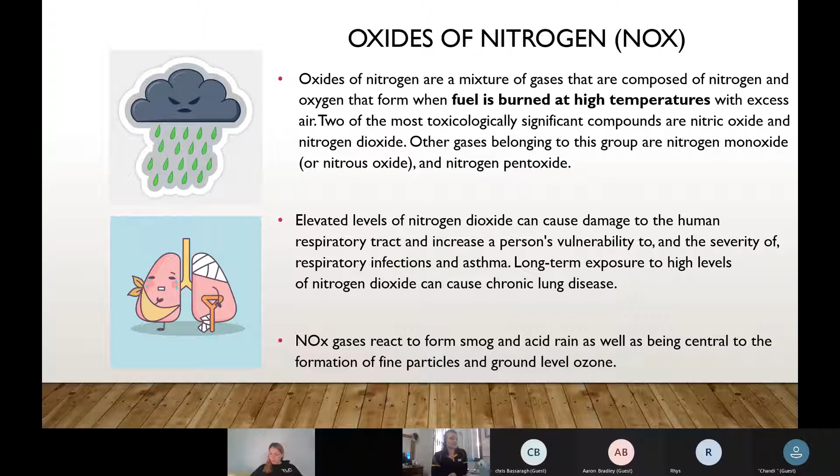The other pollutant that we focus on, or that the industry is focusing on getting rid of from our engines, is particulate matter. Particulate matter is solid and liquid particles suspended in air, formed pretty much in incomplete combustion.

At a low temperature combustion, so on startup, we usually get a bit of black smoke on that gear change when our revs fluctuate a lot. We get incomplete combustion, which then forms particulate matter.

There's a whole heap of other chemicals that also come out of our exhaust, but NOx and particulate matter are the most important. Particulate matter is pretty much anything you can see coming out of the exhaust pipe. So yeah, there are two main ones that we focus on.

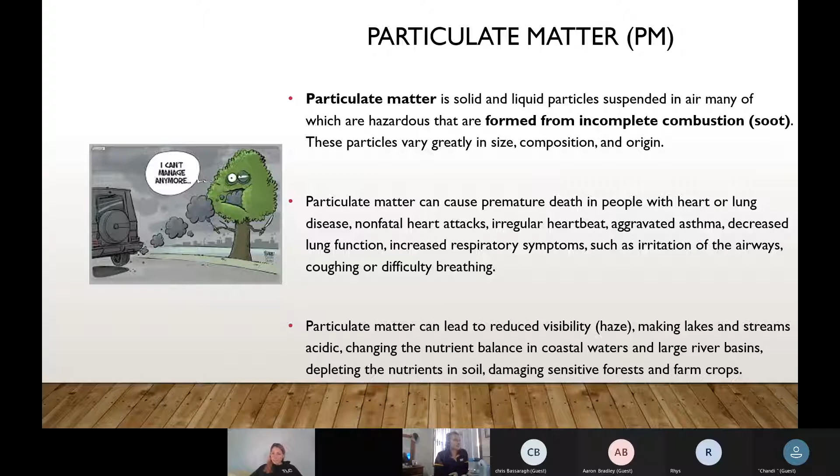Across the countries, there's heaps of different standards. The two that are most commonly thrown around are the Euro standard. Last I checked, the Euro 6D was released in January 2020, and that was the latest one for the Euro standards.

And then for the US, the latest is Tier 4 Final, which in the CAT world, we refer to our different systems as Tier 4 Final. They were phased in between 2012 and 2015, and there hasn't been any formal updates since then.

Japan also has a kind of ruling system as well, but I could not find anything that was really solid in that information. It wasn't very clear, and I was kind of just getting lost in the rabbit hole of the internet trying to find out more. But yeah, the Euro and tier kind of standards are the ones that we come across most commonly.

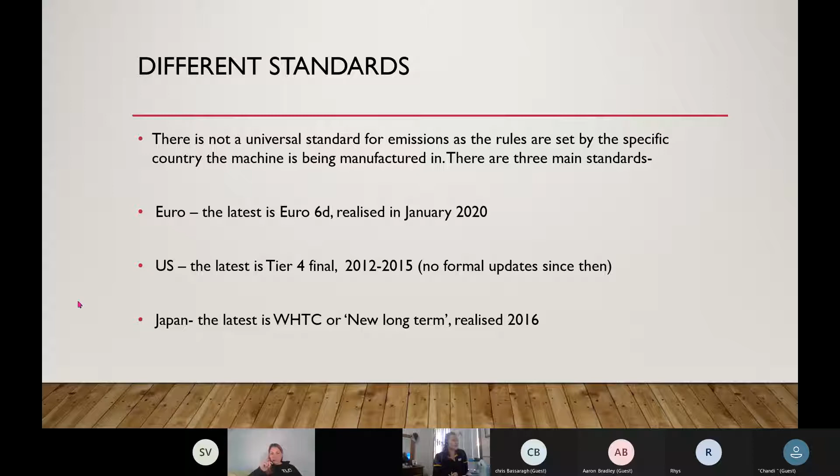So in our phasing, guys who've worked with CAT might have seen these images before. With our Tier 4, our Tier 1 kind of started kicking in between 1996 and 1999. We can see here they've got different standards for different horsepower ratings, because with different horsepower ratings, more fuel's burnt, different temperatures, different size, and also different purpose of what those engines are used for and how common they are.

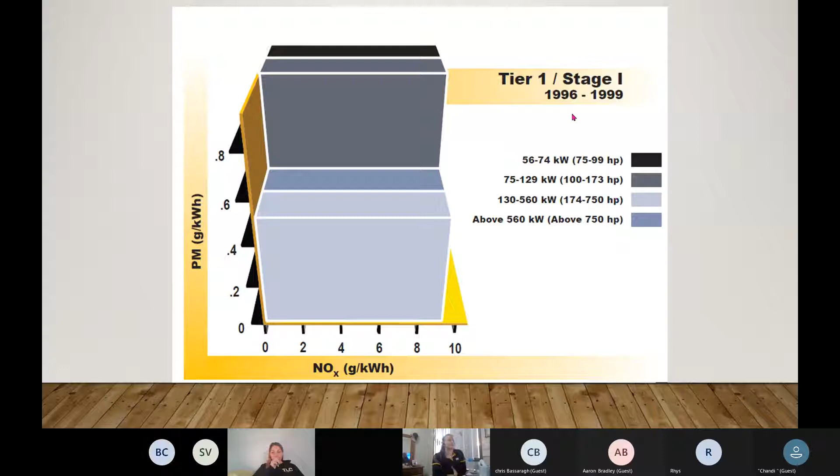So that all has an impact. They have divided into 4 horsepower ranges, and they all have slightly different standards. Along the side here, they're focusing on particulate matter, and along the bottom, we're focusing on NOx. So that was between 1996 and 99.

Then if we go to our Tier 2 or our Stage 2, that kind of kicked in and phased in between 2001 and 2004. We can see that we've cut down on our particulate matter a lot. In that phase, we've focused on what the engines can do and the engine control, so our timing and the quality of our fuel and all that kind of stuff.

The quality or effectiveness of our injectors, and adding computer systems onto our engine, so we've got heaps of different sensors monitoring temperatures and all that kind of stuff to make sure that we're having the right amount of fuel go in. Having those controls over a full mechanical engine really brought the particulate matter down. So in that Tier 2 stage, they were really focusing on particulate matter.

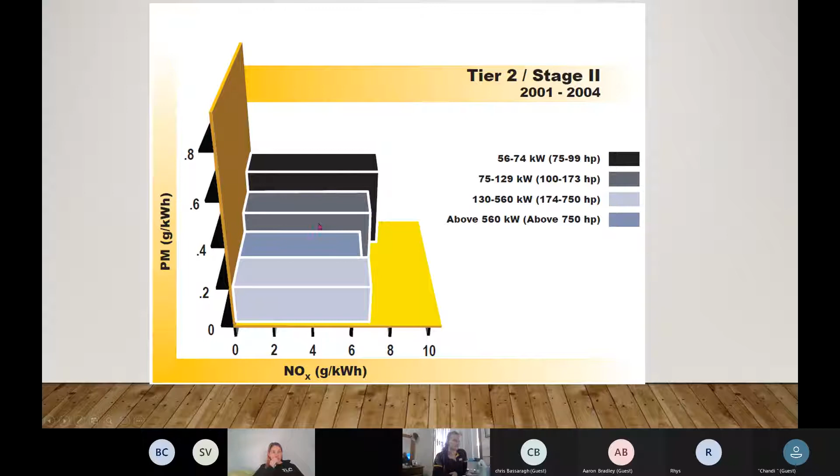We go into Tier 3, they're really focusing on NOx here. Tier 3 happened between 2006 and 2008. And for the CAT guys, this is kind of when ACERT, Tier 2 and Tier 3, is like that really ACERT kind of phase. And that's when we started focusing on NOx.

So for a lot of manufacturers in this Tier 3 stage is when EGR or NRS kicked in, and that's where we really started seeing it on our engines.

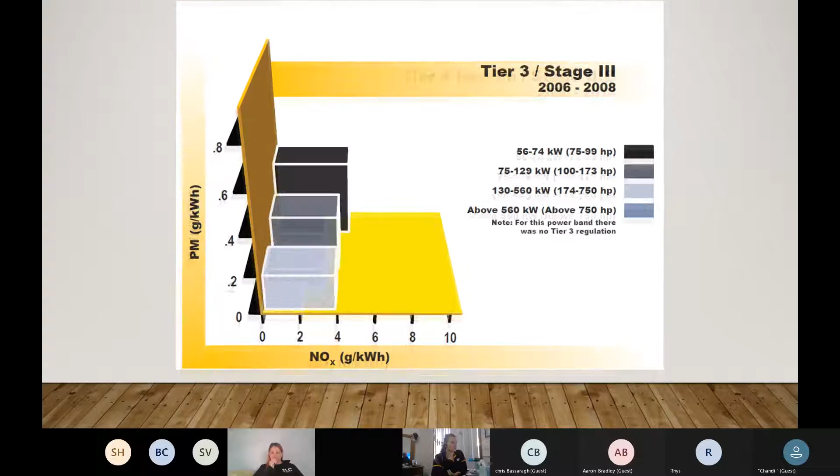Alrighty, and we've got our Tier 4 interim. So comparing it to the last lot, everything's kind of come down more, but they've focused back on the particulate matter, bringing that down again.

And then with our tier 4 final, we've pretty much gone to literally almost nothing. We've just got this range here, which is our 174 to 750 horsepower range. So our 750 and above horsepower, we still don't have as fine a tolerance on NOx there, but everything else is pretty much back down to nothing.

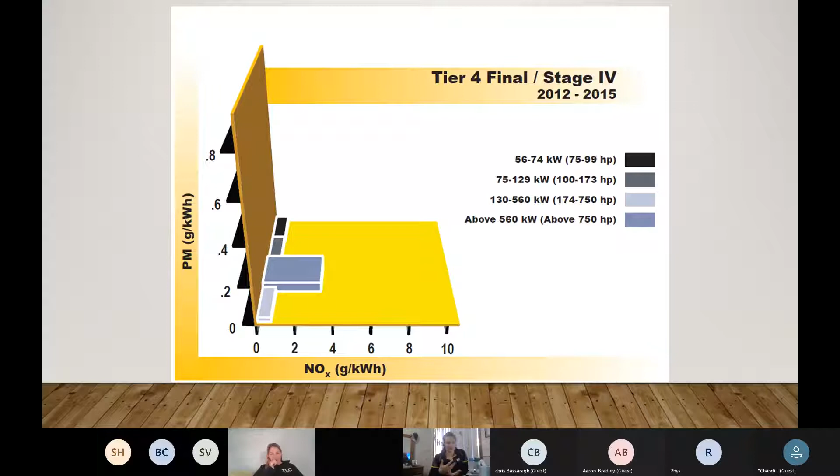So over the years, they couldn't just bring in tier 4 final all at once, everyone would go broke. So they phased it in over 20 years or so, and now we're at our tier 4 final stage.

So we're going to talk first about EGR, exhaust gas recirculation, or NRS, NOx reduction systems. CAT generally calls it NRS because they did this big hate on EGR when it came out, and then they decided to just name it something different. So NRS and EGR are used interchangeably because they are pretty much the same system.

Alright, so what do you guys know about EGR? There are a few different myths about EGR, we'll talk about it at the end. But one of the biggest myths is that the purpose of EGR is to reburn the air. So lots of people have said, yeah, EGR just burns the air again to make it cleaner. But can you burn something that's already burnt?

With EGR, the purpose of it is to put burnt gas into the cylinder that can't be combusted. So it's taking up space in there, which then makes a cooler combustion. When we have a cooler combustion, we don't have as much NOx produced, because NOx is produced when our temperatures are high. So we put in burnt gas that can't be burnt, which is taking up space, creating a cooler temperature. We don't have as much oxygen in there, so we don't get as much burn. That's pretty much what our EGR system is doing - it's creating a cooler combustion to reduce NOx.

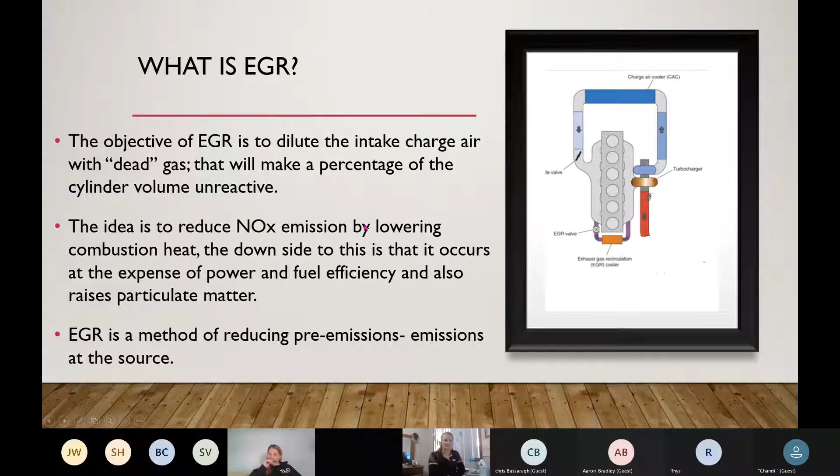Alright, so our EGR cooler is a heat exchanger. Most of the time we've got coolant running next to the exhaust gas to cool it down, to bring it back to a temperature that is closer to the intake temperature. Generally we've got a few different styles - I have some photos coming up in a few slides of some different ones.

So then we've got our EGR valve, an ECM controlled mixing chamber - that's when we're mixing our boost air from the turbo with our exhaust gas. Our EGR valve controls how much burnt gas is going to go back in. We've got our mass airflow sensor, our EGR coolant pipe getting coolant to that cooler, our air piping, and our mixing pipes. Our mixing chamber is generally what we refer to as the space just before or when our exhaust gas is mixing with our intake.

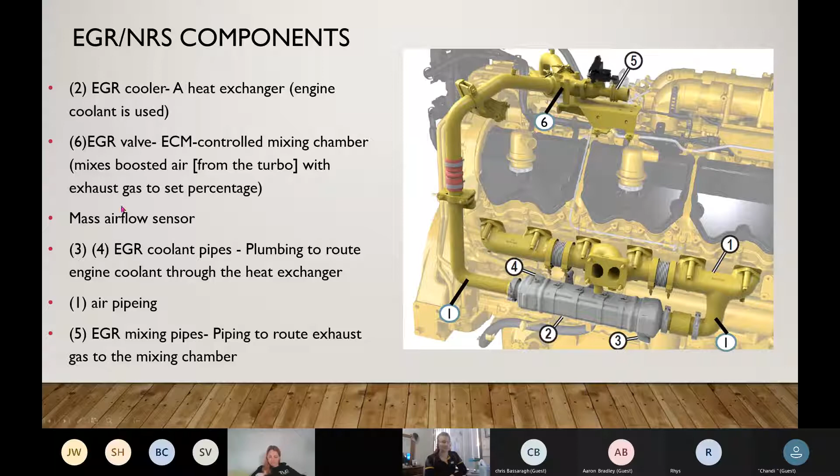All right, so we're going to go into each of these a little bit further.

So with our EGR or NRS coolers, we've got a few different styles. The Cummins one has a long cylinder where our exhaust gas goes through and coolant goes through as well. On our Detroit style engines, it's slightly different, looks a bit like an oil filter or oil cooler sitting on the side of the engine, but this is our EGR cooler, more of a cylinder shape. Then we've got a smaller one here, typically found on a smaller engine. And here we've got a CAT style one as well, up here in this system. Cummins for some reason opted to sit it below the exhaust manifold, and CAT has sat it on top of the exhaust manifold. Not in all systems, but generally speaking.

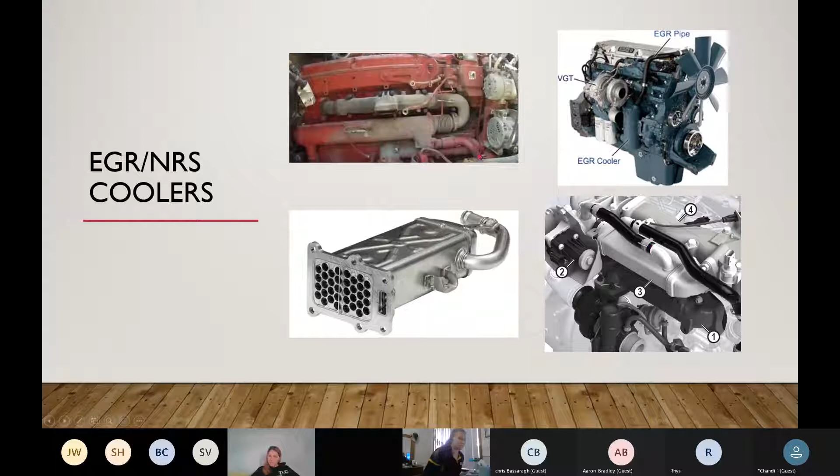All right, so our EGR and our NRS valves. This one is off a Cummins 15-litre engine here, and this one is more of a CAT style one. They both have a different style poppet valve in here, and these two in the images are electronically controlled. So in most systems, our EGR valves are electronically controlled, with a solenoid opening our poppet valve a certain amount to allow a calculated amount of exhaust gas into our intake.

Some of our CAT systems, I've only ever seen it on CAT systems, have EGR valves that are hydraulically actuated with engine oil. So that's a different type of system again. It's pretty much the same thing, there's a poppet valve, but instead of having an electronic solenoid on there, it's got engine oil under pressure sent to it, with a solenoid that controls the oil that goes there. So it's pretty much just a vice versa way of doing it, but the idea is to keep the electronics away from the heat of the exhaust system, and just have hydraulic oil opening and closing that valve.

So there's two different terminologies we can use for our EGR valves or NRS valves. They can be hot side or cold side, and that pretty much just refers to whether or not they are before or after the EGR cooler. They're generally not too different in the way they're built. The ones on the hot side will obviously be a little bit more rugged and able to take more heat. All the ones that I've seen have been on the cold side, just seems to last a little bit longer and is a bit easier on the components.

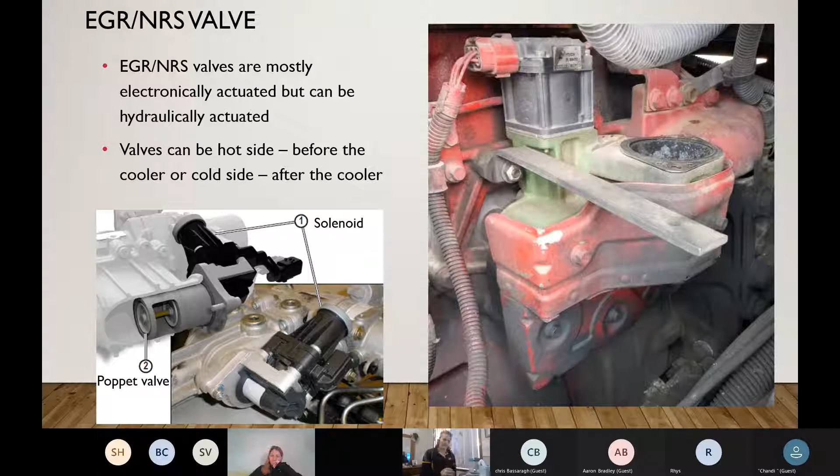Cool, so our EGR mixing pipes. There's a few different styles of EGR mixing pipes. When we refer to mixing pipes, we're talking about where our exhaust gas meets our intake gas, our fresh air. Some of the systems are created as a venturi, so as our intake air comes past the opening, it creates a negative pressure which draws in the exhaust gas. Because our intake air is boosted, it's got a higher pressure than our exhaust gas, which is kind of just chilling through there, hasn't gone through the turbo, not boosted or anything, it's just kind of coming around. So in any situation, if you've got a high pressure and a low pressure, there's no reason for the low pressure to enter the stream of the high pressure. If anything, that high pressure will start to overtake the low pressure side. But the way the engineers have designed these systems, it creates a venturi effect, which creates that negative pressure, sucking that air through, allowing it to mix with the intake air.

This red one here, obviously red, we've got some Cummins stuff. And then we've got our reed valve style, which is pretty common on the smaller CAT engines I've seen. Pretty much the idea is we can push air through, so it's quite a low pressure that can come through, but as soon as anything is pushing on the other side, it can't enter back in. So quite a simple, easy way to have that going on, doesn't take up too much space. You just kind of need that intake manifold and then chuck those reed valves in, so not too consuming of space.

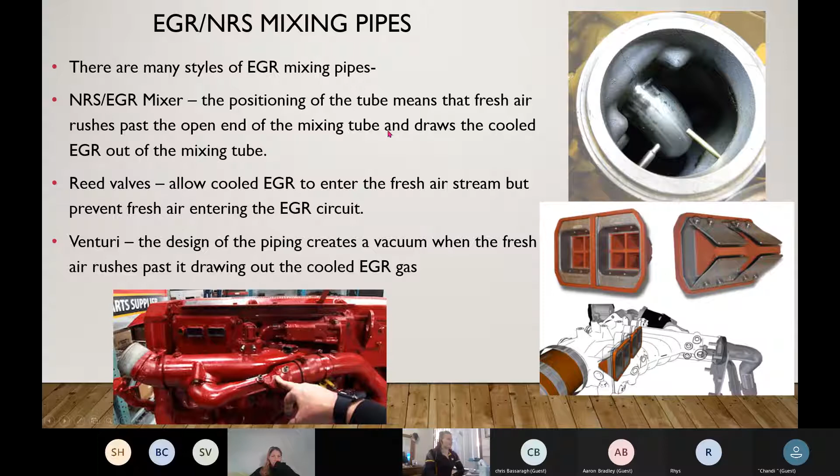All right, so our mass airflow sensor. In our emission systems, our mass airflow sensor, or our MAP sensor or our MAF sensor, whatever you want to call it, is pretty much there so we're seeing how much pressure is going into our engine, or how much air is flowing into our engine.

So if we're putting exhaust gas or burnt gas in, we're not going to have as much fresh air going in. The ECM will get the information from the sensor, and it'll be able to see that there's less fresh air going in, which means our EGR valve has successfully opened. If our EGR valve doesn't successfully open, so if it gets blocked, then we won't have any air going through. So our ECM will be sending a command to our EGR valve, telling it to open.

So the ECM knows that our EGR valve should be open, and we should be seeing a drop of fresh air at our mass airflow sensor. If the ECM doesn't see that drop at the mass airflow sensor, then it knows that there's something wrong and will bring up a code.

Alright, so that is a quick overview of EGR, what it is, and how it works. EGR is probably one of our most common things that's been around for a while, and in the process of upping our standards, engine manufacturers have opted into it and then opted out and opted in. Depends what the manufacturer decides was better off.

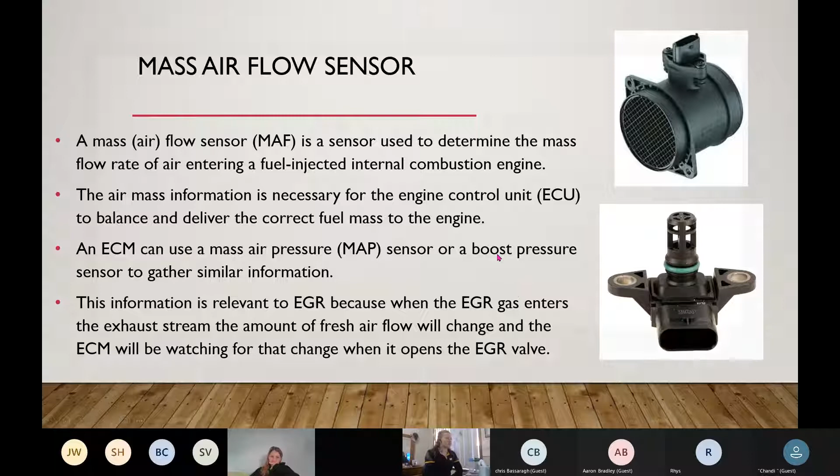Righty, so next thing we're going to talk about is diesel particulate filters, or DPFs. We generally see DPFs on systems that do have EGR. So like we said before, yeah, it's all for diesel. So all this stuff refers to diesel.

So diesel particulate filters. We were referring before to how when we reduce the temperature of our combustion, we get less NOx, but having a reduced temperature also means that we don't have as much of a clean burn, so that also means we raise the amount of particulate matter that we get. So if we've got a higher temperature burn, we don't get as much particulate matter, but we get more NOx.

So EGR and DPF are generally used side by side because we're lowering the amount of NOx at the source in the engine, but we're increasing particulate matter, so we need something to collect that particulate matter.

So the diesel particulate filter, the idea is that it catches anything solid that is coming out of our engine. So anything that we can see should be caught in the DPF. There's a little saying with DPF: if you've got an engine or a machine with DPF, if it's smoking, it's broken. So somewhere in the system, if you see smoke coming out of the exhaust pipe, there's something wrong with the DPF. The DPF might be at fault - it might be blocked or it might have been cracked from a shock coming through the engine. But definitely if you see smoke or steam or anything coming out, there's something wrong with the DPF straight away.

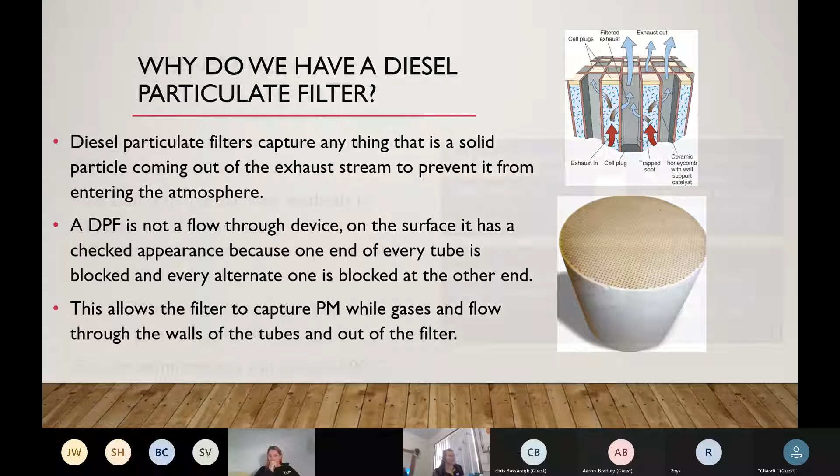All right, so regeneration - what would be the ideal chemical cleaning situation? You can't replace it. So the ideal way to clean it would just be to blow it out, pretty much the opposite way.

There are a few different machines or equipment you can get to blow it out that use ultrasonic vibrations. But generally, if you're on the side of the road and just trying to get it going, blow through the other way, or you can wash it out in the field. So in the field, just flip it over and try to blow it through, or wash it out with water.

You don't want to put any extra chemicals on that surface because then it won't allow it to regen properly, and you'll just get another fault that way. So if anything, you want to be as pure as you can, air and water, and then allow the engine to run and heat up so that water can evaporate out of it. You don't want to add any extra chemicals that can get stuck on those walls.

All right, so that's a burn. I hope that answered your question.

With our regeneration, that's a burn that's done when our DPF reaches a certain level. You're blowing through. I'm not sure what the ideal air pressure is, but generally just start low, and if nothing's coming out, slowly up it. You don't want to damage the honeycomb wall, so I don't have an exact air pressure for you.

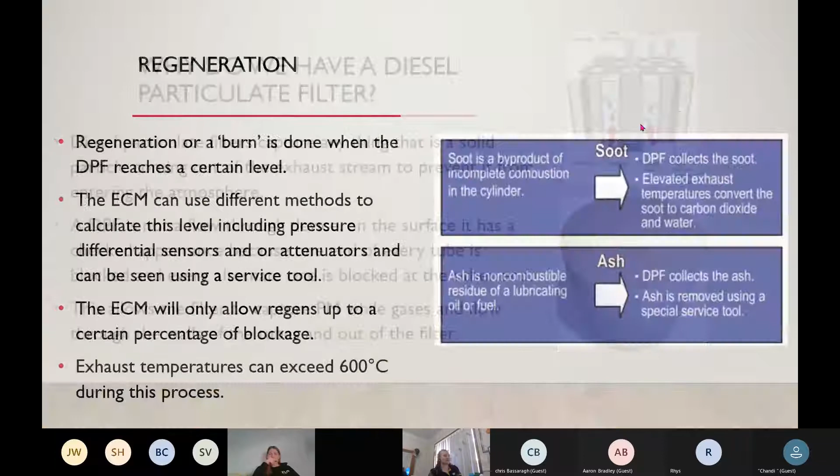But the idea of a regeneration is that those tubes that were blocked, which we saw in our last example, let's go back. So these tubes that are blocked here get built up, built up, built up with soot. If you want to get technical, you can break soot down into many different things, but for ease of explaining, we'll call everything we see soot. So soot builds up in those walls and it slowly gets blocked.

The engines or ECMs generally use pressure differential sensors, or some use attenuators, to see how full our DPF is. After that, it'll get a reading and change the running conditions of the engine to bring up the heat of the DPF, which will then cause the soot to burn off.

So our soot burns off and becomes water vapor and something else I can't remember off the top of my head, but it burns off. You're still left with ash though. It's like a little campfire - we can burn and burn as much as we want, but we still get that grey ash at the bottom, and ash can't be burnt.

So that just stays there - there's nothing we can do with the ash. We can burn soot, we can reburn it and bring that down. It converts the soot to carbon dioxide and water. But our ash can be removed with a service tool, though we can't burn ash.

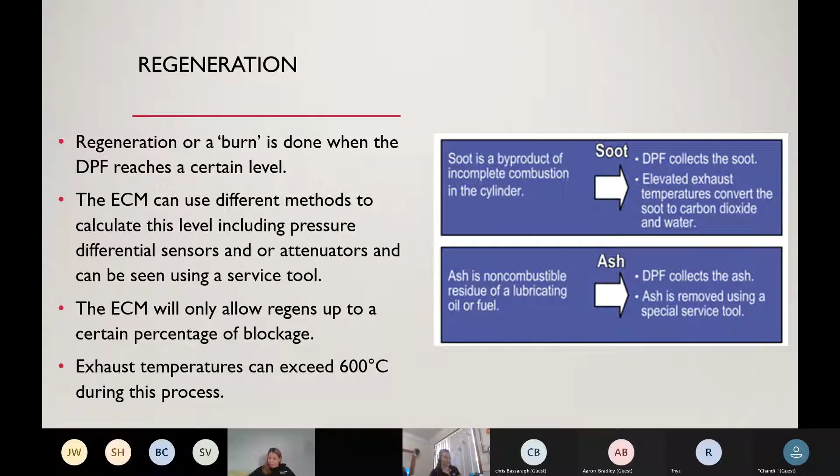All right, so there's a few different types of regens - well, there's more than a few. If you look into the world of regens and how they happen, you can go down a massive rabbit hole of different styles of regen. But I've broken them down into a few different types that are easy to get your head around. So we've got passive regens.

Passive regens happen naturally - it's something you don't really notice. When an engine is operating under load, with heaps of fuel pumping in and heaps of heat coming out, it can remove the soot naturally because that temperature has been reached to burn the soot off. So pretty much all DPF systems have some type of passive regen - if they're working hard, they'll get the exhaust up to that temperature to do a burn naturally.

Then we've got an active regen - that's when a small amount of additional diesel fuel is injected on the exhaust stroke and used to increase exhaust temperature. We'll go into ARD heads, or after-treatment regeneration devices, in the next slide or the one after that - there's something in the system that helps raise the temperature up.

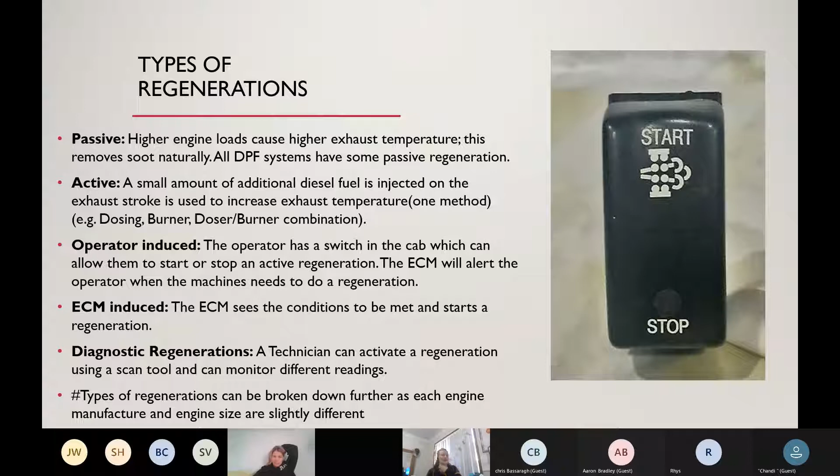If you really wanted to go down the list, there are like 5 different types of passive, 10 different types of active - they just go on forever and ever. Each manufacturer has something slightly different that they do.

All right, so we've got our different warning levels. Our operators will have different levels of warning that they'll be able to get, to be like, well mate, you need to do a regen, there's something wrong here. As we go up, it will slowly disable what type of regen you can do, just because the ECM won't be, or the DPF won't be able to do that regen safely.

This warning system is actually from CAT, but each manufacturer will have a similar thing. It'll reach a certain percentage and it won't be able to do a low temperature or a passive regen on its own. It'll just, like, nothing will happen.

So as we get up higher, for this example, at 116% we'd have a derate and then we'll have a level 2 event. And then at 127%, we'll have an alarm, a derate, a level 3 event. So a lot of these things are slowly, the engine will derate 25%, 50%, 75%.

And then on some equipment, you'll only be able to start and run the machine for 30 seconds, and then you can keep running it for 30 seconds. The idea of being able to run it for at least 30 seconds is that you can get it off a haul road or a main road or out of danger. Otherwise, you're not going to be able to operate it because old mate's been too stubborn and hasn't got this sorted out earlier.

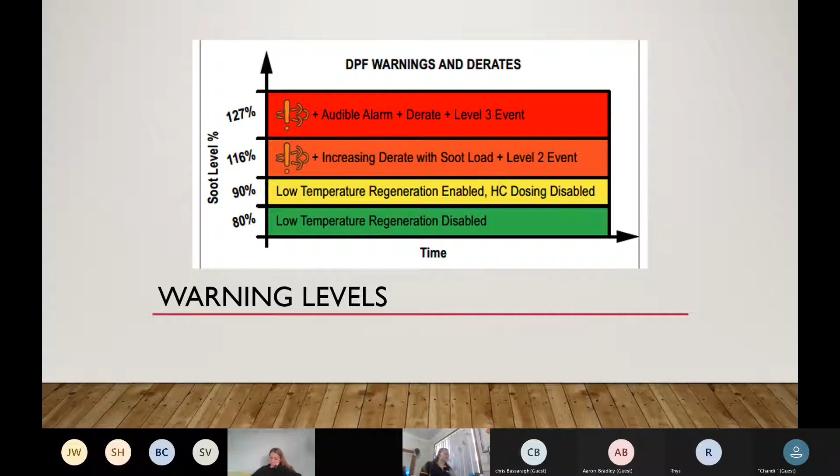With this there's different types of active regeneration devices. So for the CAT world, there are ARD heads. Mack also has a similar system that's just kind of in a different configuration. But pretty much the idea of this is to raise the heat.

With our ARD heads, they're pretty much just like a little motorbike engine - that's the way that I like to explain them. So they're pretty much a little cylinder head, and they've got a spark plug, clean air going in, and fuel going in.

So pretty much if you took the exhaust off and just had the ARD head in there, obviously your sensors and all that kind of thing wouldn't let you run. But if you could run it, it'll literally just be a flamethrower - throwing out this massive amount of heat that is caused by that little combustion happening in the exhaust stream.

So pretty much ARD heads, or after treatment regeneration devices, are put on systems where it's very unlikely that they're going to meet the temperature on their own. So if it's a generator or a small excavator, or larger equipment, the way that we've put this engine together, it's not going to be able to adjust the air-fuel ratio on its own to then bring the temperatures up.

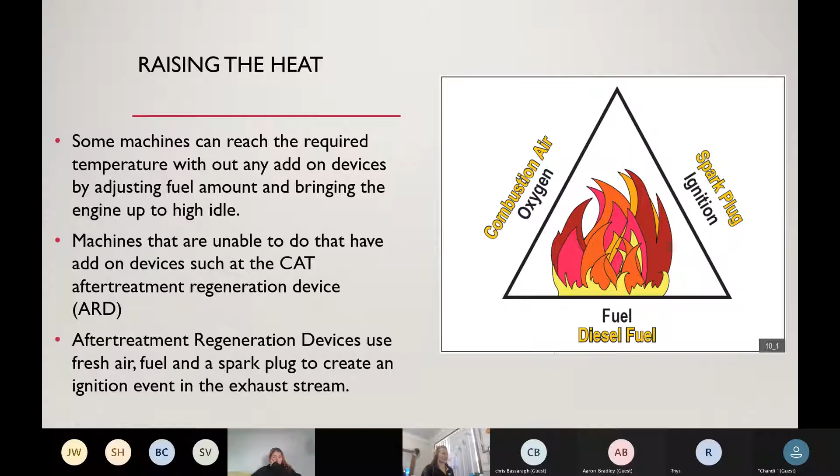So they whack on one of these ARD heads. For those who've worked on them, when they first come out, the CAT system with the ARD head, I'm pretty sure everyone just wanted to burn the machines to the ground. They weren't too great at the beginning.

With our after-treatment regeneration devices, because we've got a combustion event going on, we need fresh air. That fresh air comes from our combustion air valve, which is pretty much a pipe coming off our intake over to our ARD head, and it's got just a butterfly valve opening and closing, allowing it to flow into where that ARD head is, ready for it to be combusted - it's not flowing into the exhaust itself.

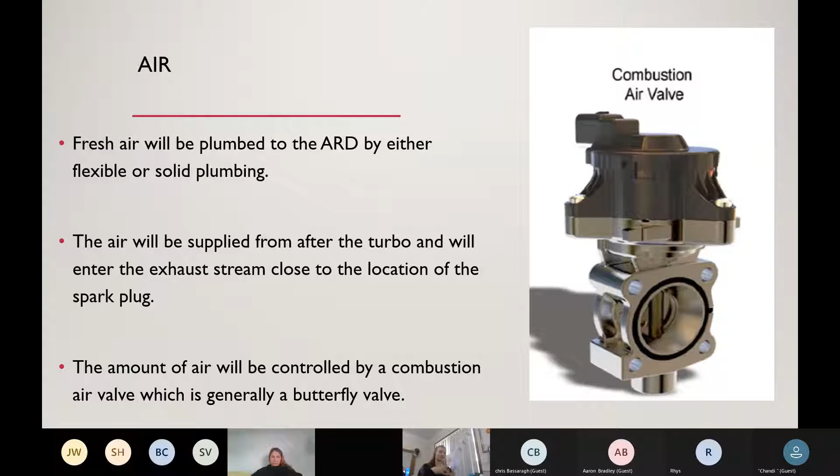All right, and then we've got fuel going in. So the fuel going in can either be done by an electric pump or just coming off the main fuel system and having a little solenoid there that allows it to come off.

So this one's got an electric pump on it. This one's quite common, this is a CAT one. Then this number 2 here is a pressure regulator. So pretty much this fuel system on our ARD head is just like any other fuel system you'll come across. It's got a pump that creates pressure, and obviously when we have pressure, we need a pressure relief valve, because if we get too much pressure, our system's going to explode, and we don't want that.

So pressure relief valve, we've got solenoids controlling it. In this system we've got a few little filters as well, just in the fittings. And we've got pressure sensors as well, and our little injector at the end. In the CAT system it's part of that ARD head, and you can't buy them on their own, as far as I'm aware, from last I checked.

So pretty much the fuel system's the same - pump, pressure relief valve, lines, filters, solenoid, injector, pressure sensor. You troubleshoot it like any other system. You've got to make sure you have pressure there, otherwise nothing's going to work, and our solenoids need to be opening and closing.

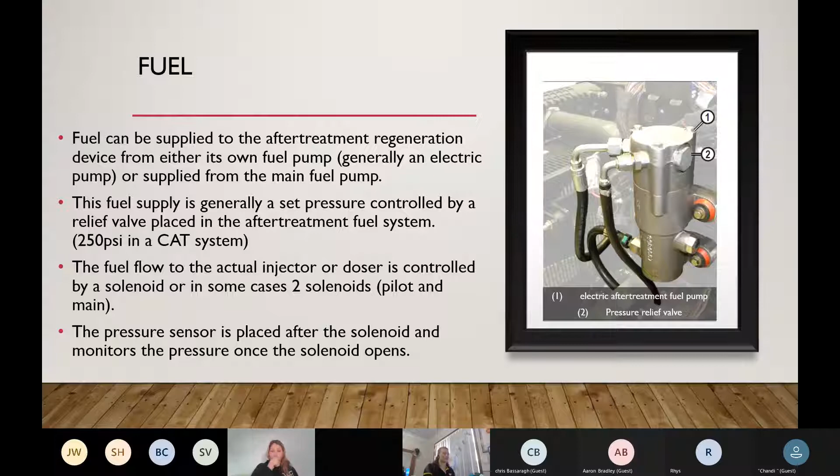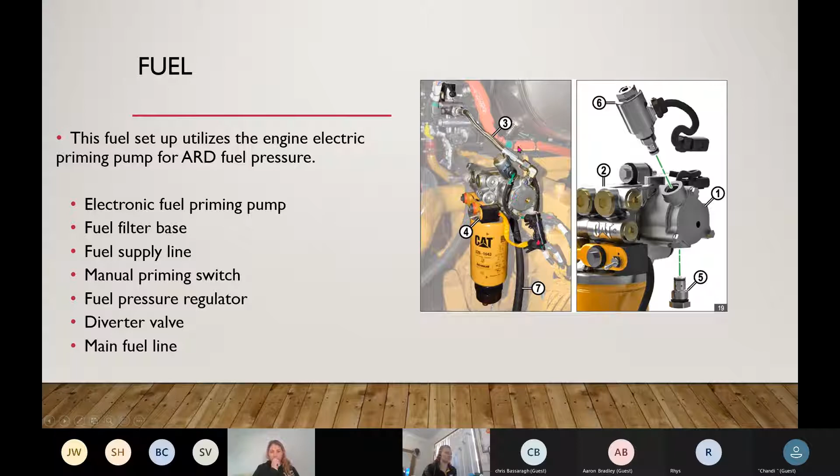This system here is just coming off our standard fuel system. So it's got this little module on the side here, which then directs it over into our after treatment fuel system. So that little one here is called a diverter valve. So it's diverting that fluid off into that system.

Also, this is our little fuel rail. So some of our fuel rails will have 2 solenoids on them and 2 pressure sensors. So we've got pilot and main. Not all systems have pilot and main, but some of them do. They pretty much still both work in the same way.

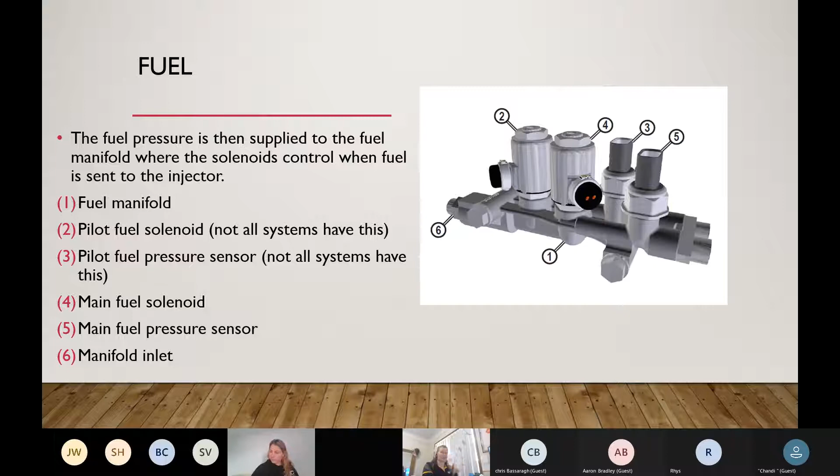I'm just looking at, we're kind of running out of time a little bit, and I wanted to touch at least a little bit on AdBlue systems and on SCR. So I'll just go through this a bit quickly.

And then we've got our spark plug. So pretty much our spark plug is like any other spark plug on a motorbike, car, all has the same components. We've got our coil, our ignition coil, and then we've got our spark plug lead, and then we've got our spark plug in our ARD head.

Our spark plugs on our ARD heads are slightly different. They don't earth out on themselves, but they arc to a little thing on the ARD head. So if that little thing on the ARD head warps or anything, you will get a fault in there.

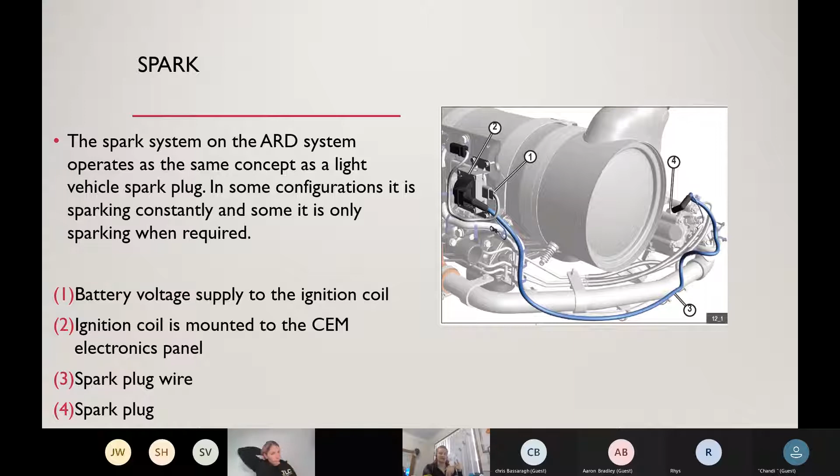All right, so we won't go into this too much. Some of our ARD heads have coolant lines going to them to keep them cooler, so that fuel doesn't heat up, as well as that combustion air doesn't heat up, and the spark plug stays in operating temperature.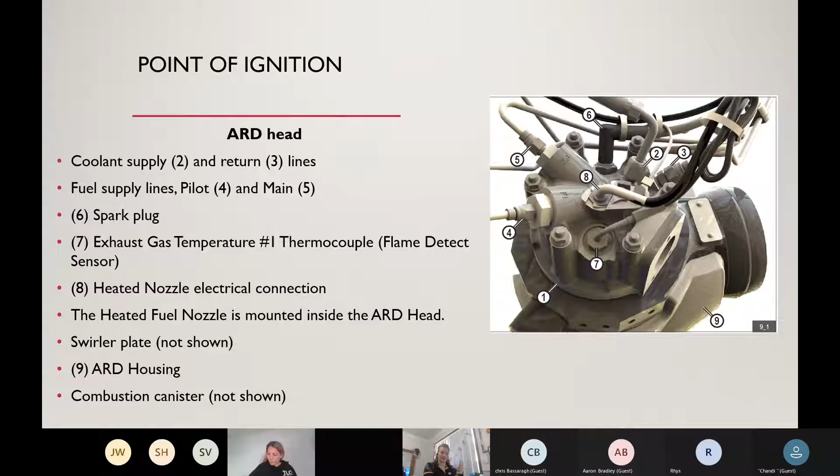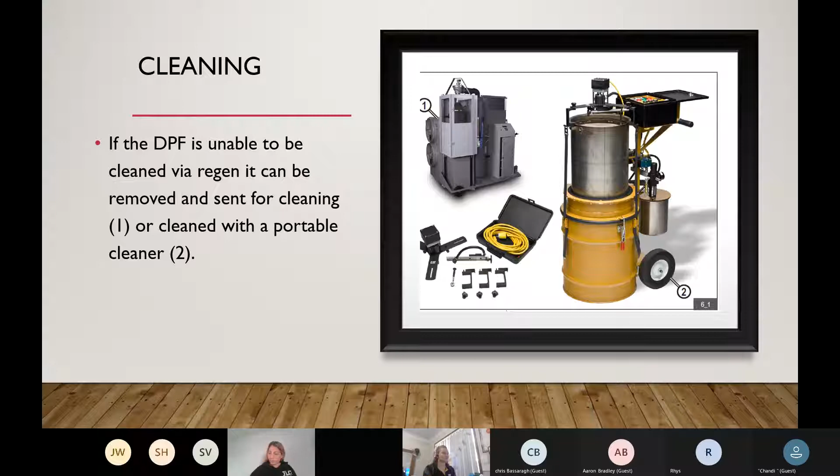All right, diesel oxidization catalysts. So catalysts have been used on cars for forever. But the reason why they couldn't just whack a catalyst on a diesel engine is because the chemicals that come out are slightly different, and it doesn't create the reaction as easily as a car engine does, or a petrol engine. So what a catalyst is, is a substance that takes part in a chemical reaction without itself undergoing any change.

So it's pretty much just like a precious metal. Most of them are a precious metal, and they can take part in a chemical reaction to change one chemical to another chemical without itself undergoing any change. So in a perfect world, a catalyst should never have to be changed because it should just stay there as is, just kind of chilling and everything's happening around it.

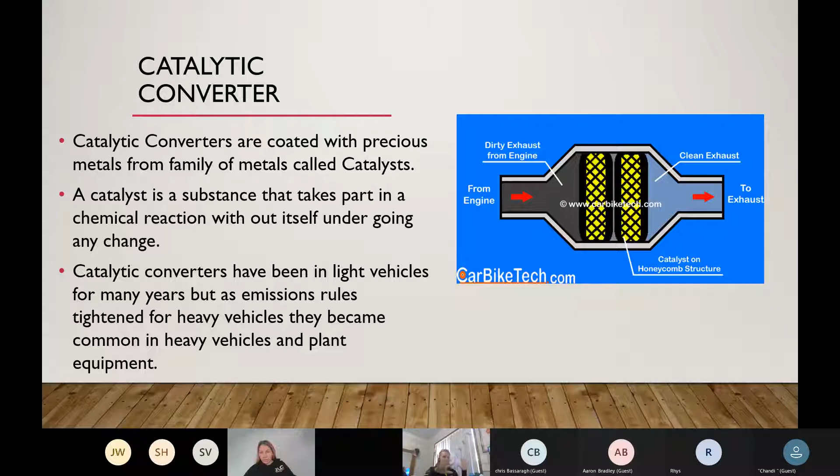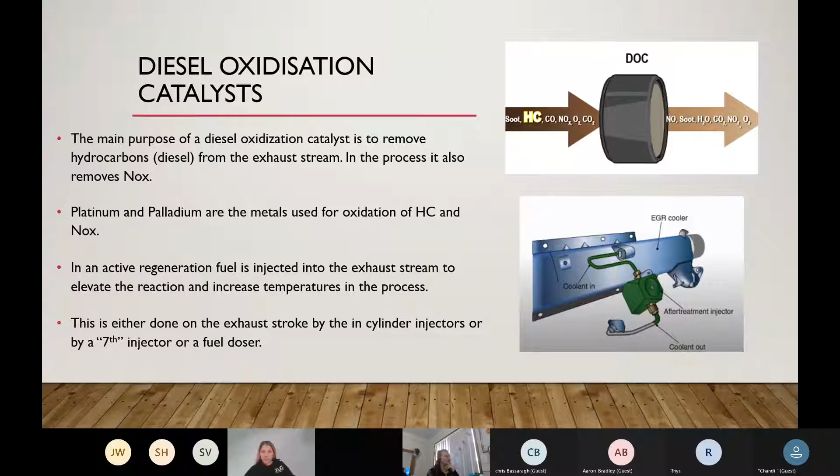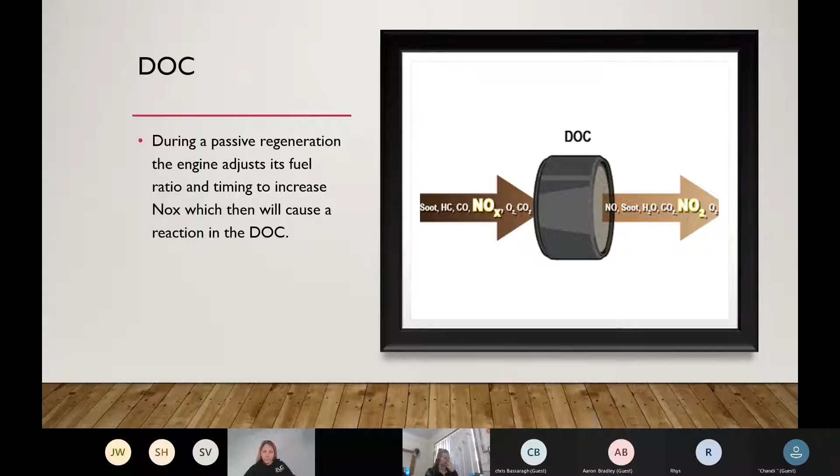So we're going to skip past this a little bit, but pretty much during a passive regen, we have our NOx and it can change into NO2 depending on, there's heaps of different types of catalysts. So depending on what metal they're coated in, they can convert one chemical into another chemical, or less. The idea is that they convert it into less harmful chemicals, usually oxygen and water. All right, SCR.

So selective reduction catalysts are what we call, for some reason, the catalysts that reduce NOx. So we've got DOCs, our common type of catalyst, so diesel oxidization catalyst. And the point of our diesel oxidization catalyst is to catch and convert any extra hydrocarbons. So hydrocarbons are our diesel matter. So we want to convert any extra fuel that's coming out into oxygen and water, I'm pretty sure. But our selective reduction catalyst is what converts our NOx into less harmful chemicals, which I can't remember off the top of my head what they are.

So SCR, or selective catalytic reduction, to convert NOx, needs extra things as part of this process. So we talked a little bit before about how catalysts have been used on petrol engines, but not on diesel engines, because the chemicals coming out of the exhaust pipe aren't exactly right to create that chemical reaction. So to convert NOx using SCR, which is coated in rhodium, it needs AdBlue. So what AdBlue is, pretty much, or DEF, whatever you can call it, is ammonia. So pretty much it's water and ammonia.

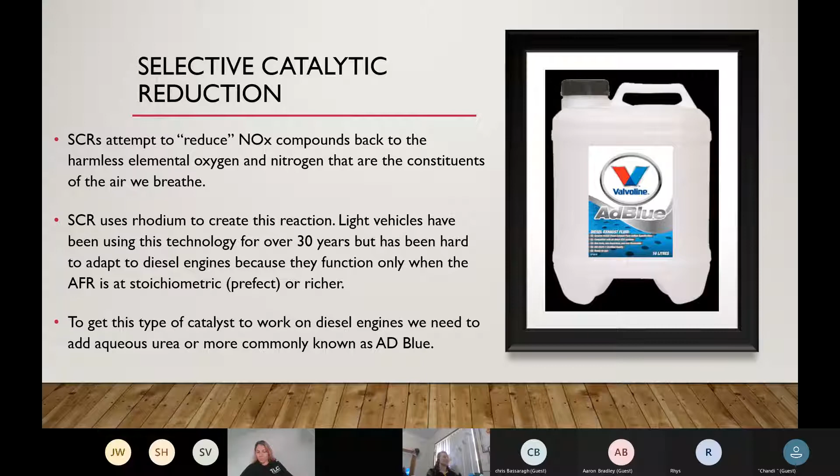So our rhodium catalyst needs ammonia to then convert NOx into less harmful chemicals. So in our component systems, or our AdBlue systems as we refer to them, it's pretty much just like another hydraulic system whacked on there. A lot of people get caught up thinking the magic happens, but if you really break it down to the simple parts, it's just a little hydraulic system.

You've got a tank, you've got a pump, you've got some valves, and then you've got an injector, which injects it into the exhaust stream. Like anything, we need to make sure it's not blocked, and all that kind of stuff.

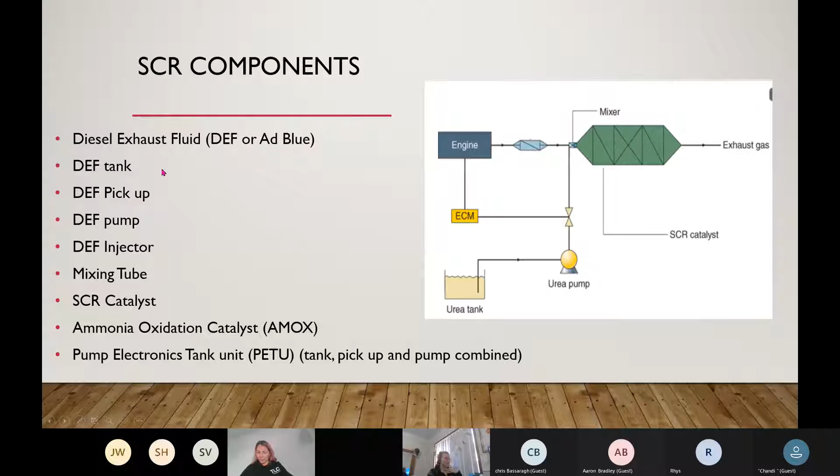With that, so AdBlue, we went through that. Our DEF tank is generally a plastic tank with a blue cap. We've got different colored caps for different fluids, and blue is for our AdBlue. Sometimes they have a fancy filler neck which requires a special nozzle to fill it, to prevent customers from putting diesel in the AdBlue tank.

People are still able to put AdBlue in the diesel tank, but yeah, the idea is that some of them will cross it over because, people. So we don't really want anything in a metal tank, or our AdBlue in a metal tank, because it can corrode away.

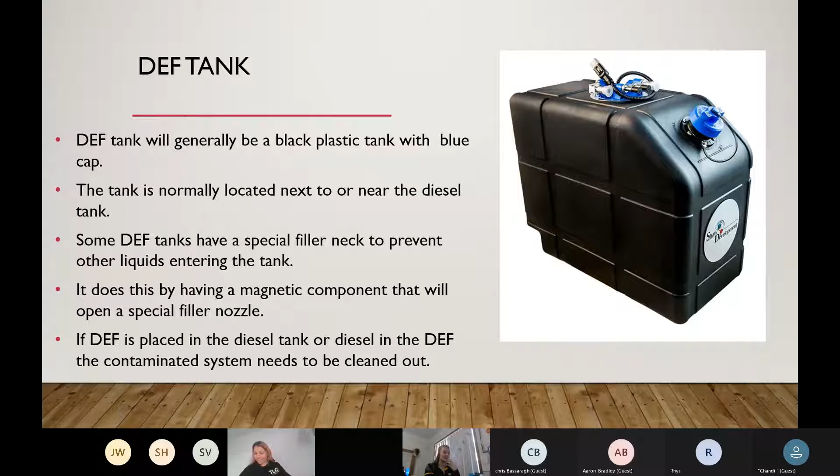All right, so our pickups. Our DEF pickups into our tank generally have four lines going to them. Two of them are for DEF in and DEF out, and two of them are for coolant in, coolant out.

So the idea of the coolant going in there isn't to cool, but to heat it up. We don't want our DEF to freeze. We want it to stay nice and warm and flowing. Otherwise, we'll have issues in that department as well.

And also they've got a sensor on them. So in this one here, you can kind of see a sensor. Some of them have ultrasonic sensors, so it's sending a signal down and then it vibrates back up, and the sensor can calculate how much DEF's left.

Or they have like a magnetic float that goes up and down, pretty similar to a petrol tank, but then sends a signal back on how much DEF there is left. Some of them are also smart enough to pick up the quality of the DEF in there as well.

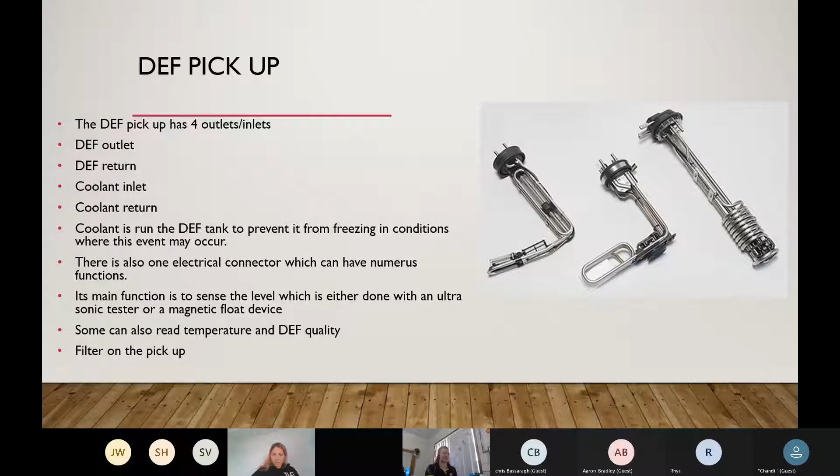All right, so we've got our little pump. Our pump does a few different things. Our pump controls, depending on what type of system it is, our pump controls how much DEF goes to our injector.

Some of the pumps also control the timing, but then we can also have injectors that have a solenoid on there that control the timing of the diesel exhaust fluid injection at the exhaust point where it enters. And some of it control it from in the pump unit.

But our DEF pump also creates a vacuum to then draw the fluid in or pushes the fluid out.

So the idea, this is called purging. On the CAT systems, or on most heavy vehicle stuff, we've got a purge light now next to our isolator. What that is, if our diesel exhaust fluid is left in the lines, it can crystallize as it warms up, the water evaporates, and it sits there and crystallizes and blocks it. The idea is that we need to purge all the DEF out of the system, so it doesn't crystallize while the machine's sitting there overnight or over the break.

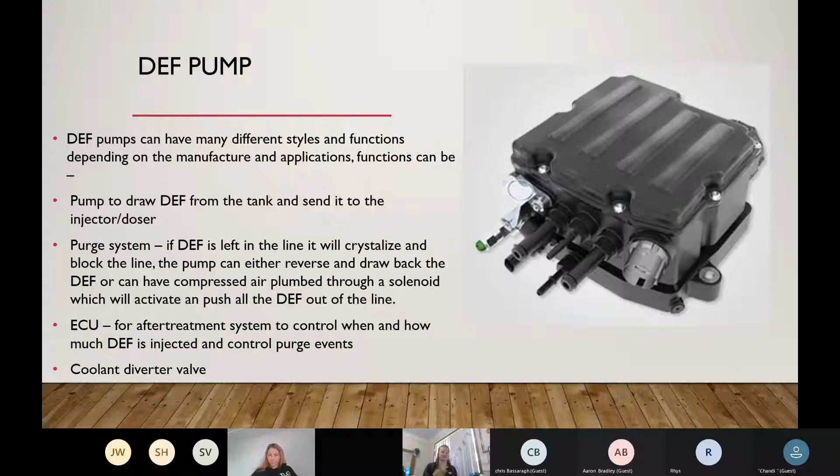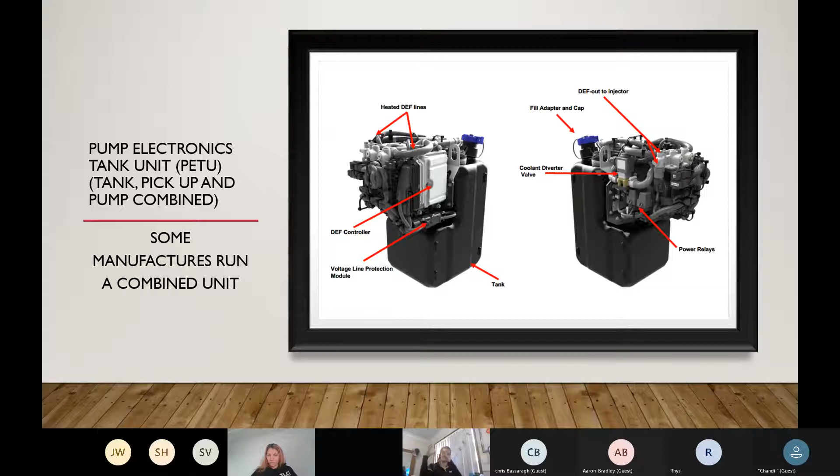So there's a few different ways depending on what type of injector you have on there, which we'll go into in a minute. Put the injectors on here. Some of those pumps are built into the tank, so it's like one unit, tank and pump. And some systems just have a simple tank, and then the pump mounted somewhere else with lines going to it.

Cool, so injectors or dosers. Like I was saying before, there's two different types of dosers or injectors. We've got injectors that have their own solenoid on them, and then we've got injectors where all the timing or doses is controlled at the pump.

With a system like this, generally when we're doing a purge on it, air will be blown through. So if the machine has an air compressor system for air brakes, it will generally blow air through and push all that diesel exhaust fluid out. It's better to have it sitting in the exhaust pipe than in that little line. And then we've got these ones here which have a solenoid on them.

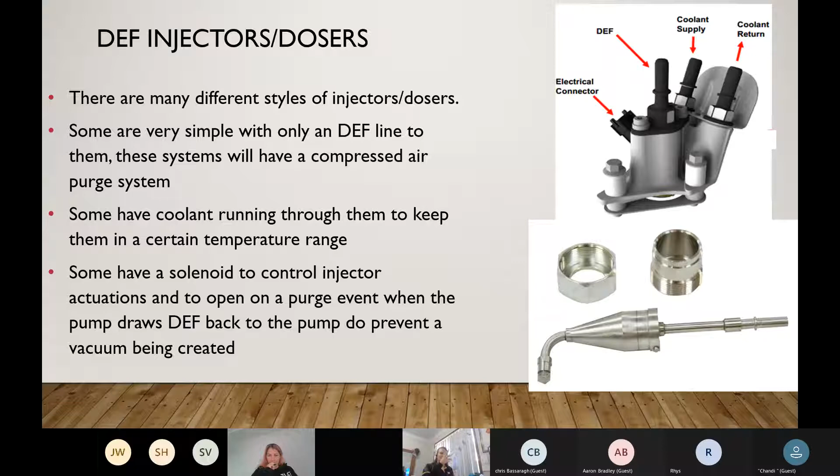On some systems that don't have an air compressor, so no air brakes or other air systems, the pump will actually reverse and suck it all out. So the idea is it's reversing, sucking it all out, so then there's nothing left in there. What that does also is, when it's sucking it all in, it opens that valve so it doesn't create a vacuum. It's also sucking some fresh air in after it so it doesn't make a vacuum and crush everything.

All right, then we've got our mixing tube. Depending on what type of system it is - if we've got a CEM, the clean emissions module, which is our DPF, our DOC, and our SCR all in one module - cat guys, I think you know what I'm talking about. They're generally whacked on top of the engine and make it really hard to get to anything else. They'll have the injector just sitting in the middle of that.

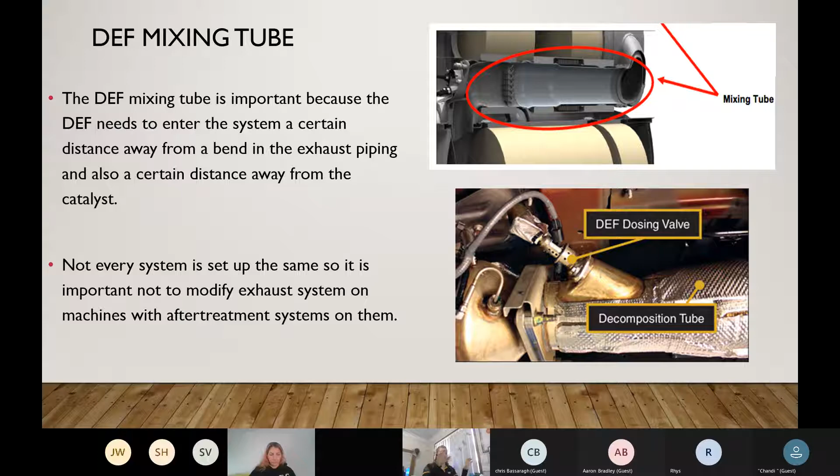But if it's just a standard setup where you've got unit, piping, unit, the DEF dosing valve will be in between there. It needs a certain amount of straight pipe for that AdBlue - for the water to evaporate, and then the heat reaction so the urea turns to ammonia and hits the catalyst. So there does need to be a certain amount of straight pipe in there. If anyone does modifications on exhausts and has injectors in the exhaust, you need to make sure there's certain requirements met for straightness before a bend in those systems.

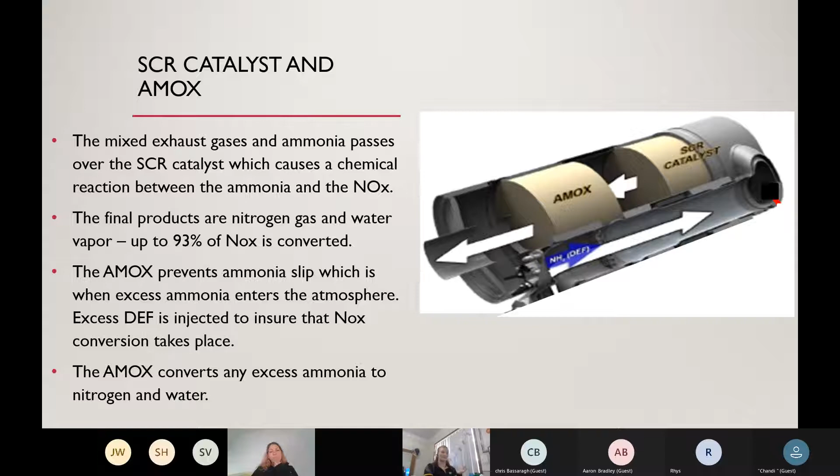All right, so when we have an SCR catalyst, generally we have an AMOX next to it as well. An AMOX is an ammonia oxidization catalyst. So pretty much any extra ammonia in the system that doesn't get used to convert NOx will get caught by the AMOX and then converted to nitrogen and water, making it less harmful from there.

All right, cool, I think we're at 10 o'clock now. I had some more stuff going into it a bit deeper, and we almost made it to diagnose and repair. But anyway, from that guys, we're just going to stop it there. Sorry for the last little bit being a bit rushed. I'm going to stop sharing.

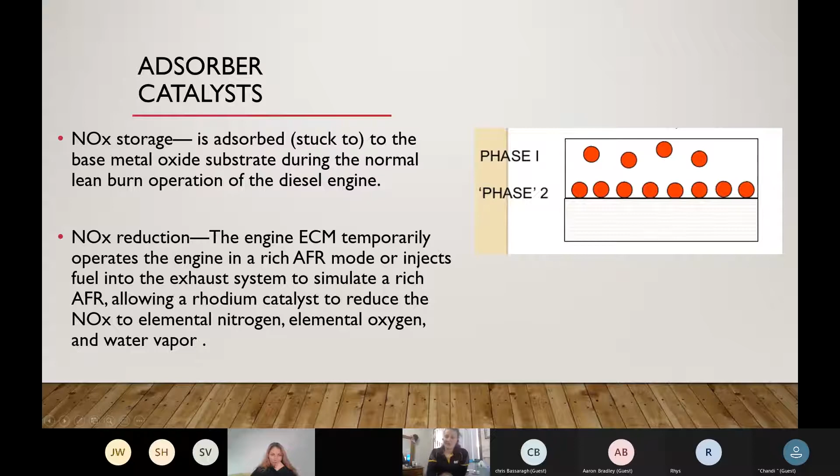Oh, let me go back to seeing me - not my PowerPoint anymore. All right, sorry for that last bit being a bit rushed, I kind of hung out on EGR a little bit too long. But I hope you guys got a bit of an overview of the systems, how they work, and just a little bit of background, because when you know how something works, it's a bit easier to fault find it.

Did anyone have any other questions, or any comments or anything? If you guys want me to do something like one hour specifically on one of those - I know we kind of touched on everything - but if you're working more or want more information on the AdBlue system, we can go on and really break that down. I can almost talk about that for a whole day, but no one wants that. If there's one system in particular in the emission systems you want to just sit and focus on, let me know, and we can do one hour on that system in particular and go through fault finding, different parts. All these systems have sensors and stuff that we didn't really go into too much, but we can really go into them in a lot more detail. Like I said, I usually go through this a whole day.

Any cutaway images with the ARD head? I think I do have some of the ARD head. I'll note that down and see what I can find for you guys. I mean, I've got like 15 different notebooks. All I need is an empty one.